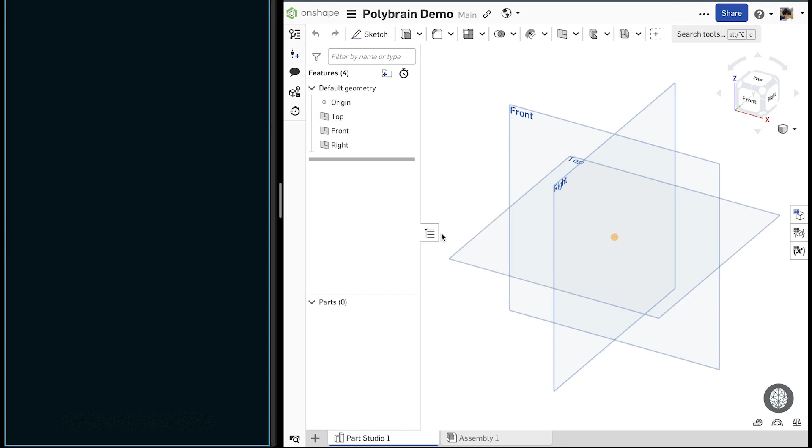All right, here's another demo. Over here on the left, I have the console output of Polybrain, and over here on the right, I have Onshape. I'm going to talk to Polybrain through text instead of using my voice. First I'm going to ask something that's totally unreasonable. I'm going to say, can you create the Saturn V? The Saturn V. I want it to be a one-to-one replica.

So now I'm going to ask Polybrain to make me a lamp, and we'll see how it does. I'll say, can you create a lamp that has an 8-inch diameter base with a cylindrical lampshade. The lampshade should be 5 inches tall and 6 inches in diameter. The lamp itself should be 15 inches tall total. Connect the lampshade to the base using a 1-inch diameter rod.

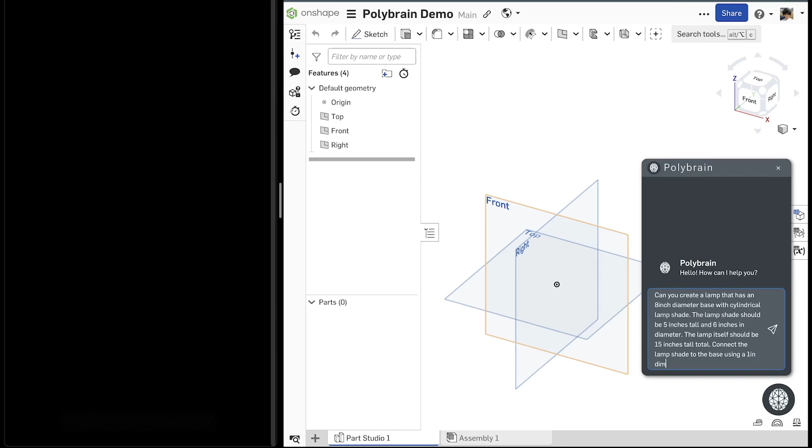Great, okay, let's see how it does. So it looks like this has gone through the pessimist. The pessimist liked it, and now it's passing a summarized prompt to the executive planner, which ran into an error. It's going to retry. Great, so we get this little summary here, which says summarize the executive plan, which was up here.

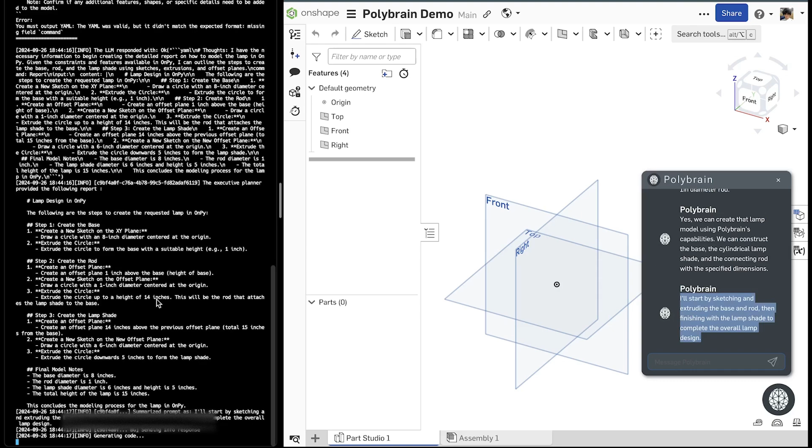So we have parts: create the base, create the rod, create the shade - I guess it was only 3 parts, right? So those 3 parts get converted into OnPy code, which then get executed in real time, as you can see here. And that's pretty good for a lamp.

So it'll ask, does this model meet our specifications? And I'll say, yes, that's great. Now if I wanted something different, I could say something else.

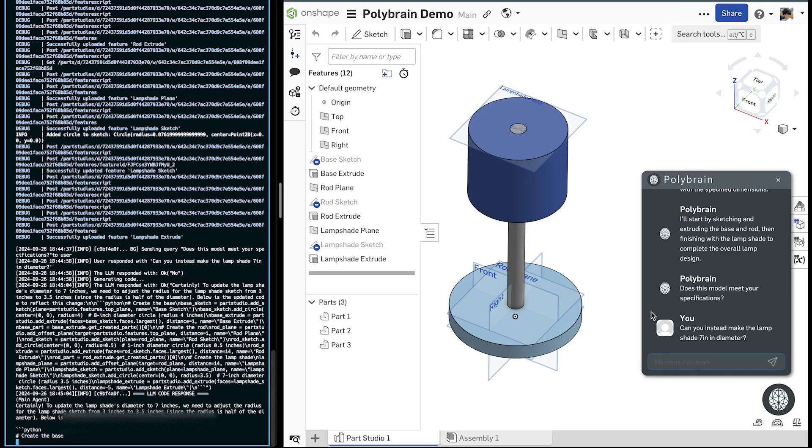Let's try this: can you instead make the lamp shade 7 inches in diameter? And now it should go back and try to rebuild this model and make that change. So here we have this new code that it spat out.

So it's going to delete the other model. You could make this a little more efficient. And it's just going to rebuild it. It takes a little time to execute.

But that looks pretty good. And if we check, yep, that's 7 inches in diameter. So yeah, that's great. I'll say, yes, that's great.

So this kind of iterative process where not only you can check the LLM, but the LLM should in theory be able to check itself. So if all of these shapes didn't line up and whatnot, this is where having a photo validator could be really interesting or really useful. But honestly, just asking the user, is this good, can be good enough on its own.

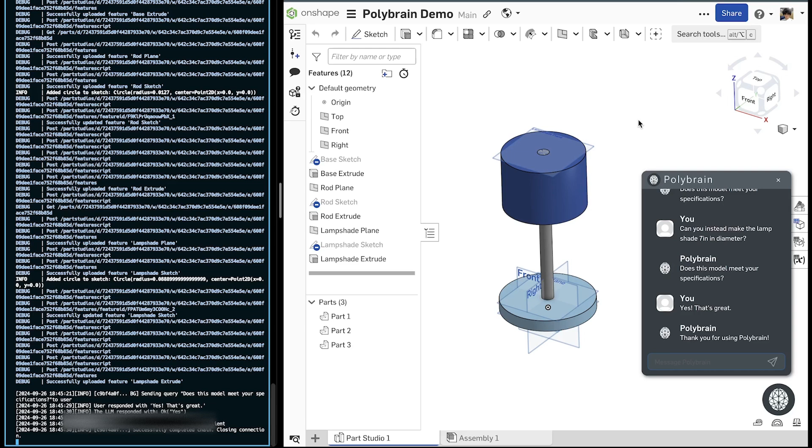Great, so now the question is, what comes next? And I think my answer is not a lot. Prompt engineering develops extremely fast, and the code I wrote for this project a few months ago is already pretty much obsolete. So I think I'm going to let prompt engineering and this whole AI stuff mature a little bit before I really delve into this project more.

RAG has also been improving a lot. There's an iterative way to automatically use RAG and prompt engineering to optimize your prompt. It gets pretty complicated, but it's really promising for the future of this stuff. Then there's also tool invocations that I didn't cover too much - these agents have the ability to call tools. An example of this is when the mathematician talks to Wolfram Alpha.

Pretty much the agent will respond with, say, hey, I want to call this. And then we parse that and send it off to Wolfram Alpha, and then do some prompt engineering to provide the Wolfram Alpha response to the agent again. And this has happened so much in all these other projects that OpenAI has started to officially support this, and now there's a more efficient way to do this.

Then there's also OpenAI's O1 model that came out very recently, and this does a lot of the introspection itself - you no longer need to do your own prompt engineering to get the LLM to talk to itself and whatnot. And then there's image validation, which I mentioned is in very early stages of development. I should probably say it's not at all developed yet, because I've done a little research, but it's very, very new. I'm in school, I'm at Ansys, I don't have a ton of time to develop all this stuff on my own, so image validation has taken a back seat.